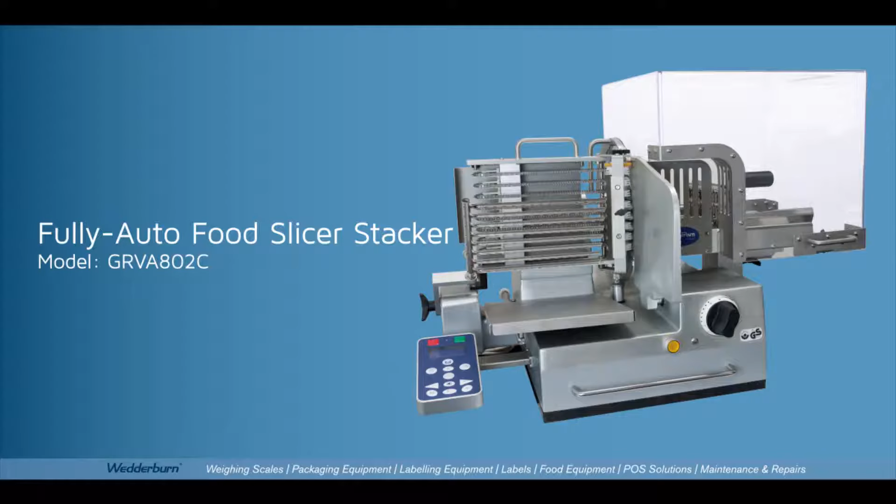Wedderburn proudly supply a range of robust and safe equipment for food processing. Today we are running through some of the features of the GRVA802C fully auto food stacker slicer. This is a high quality German engineered machine.

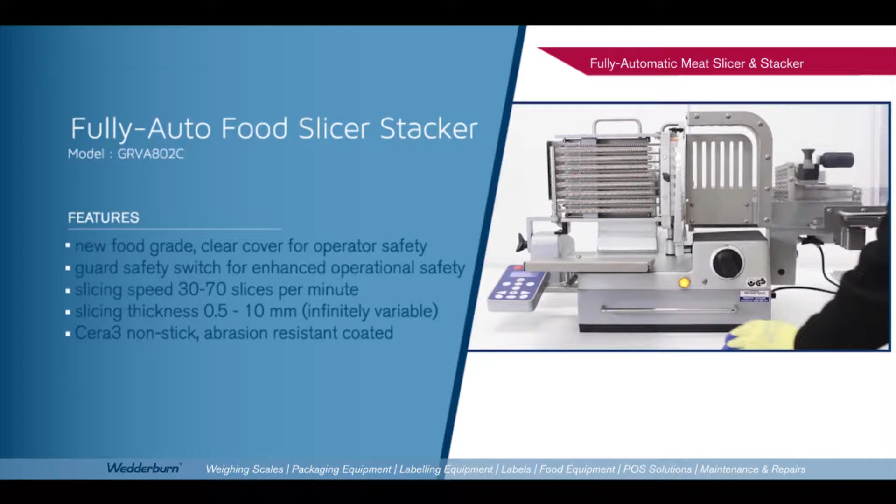On the screen you will see some of the features. It has a food grade safety cover, a guard safety switch, slicer speed 30 to 70 slices per minute, slicing thickness 0.5 to 10 mm. This machine also has a special non-stick coating. We'll be going through some of the safety features later on in the video.

Here are some of the slicing modes: stacking, shingling, slice direct and shaving. Stacking up to 90 mm high, shingling also up to 90 mm high. You can also adjust the thickness as you go.

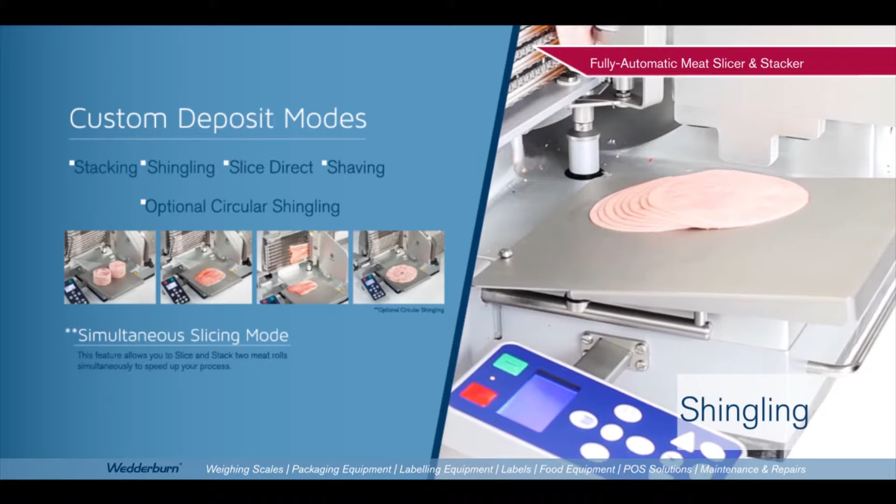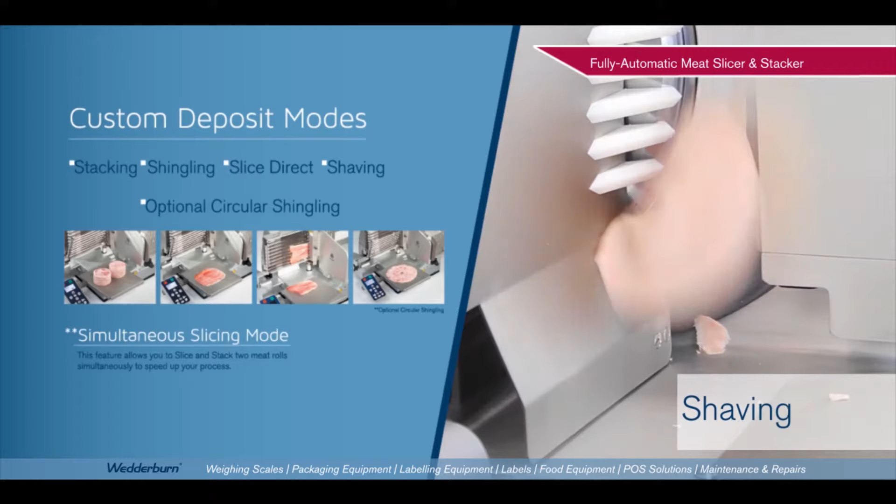Slice direct: you can slice direct into a box, on a plate or into your hand. Shaving: you can also adjust the thickness as you go. This allows you to slice and stack 2 meat rolls simultaneously to speed up the process.

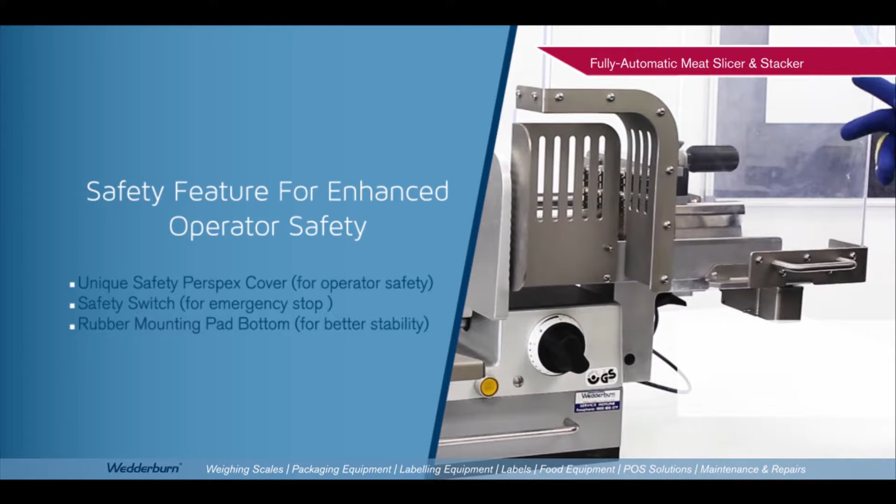Now we will go through the enhanced safety features of this fantastic machine. It has a new safety perspex cover for operation safety. It also has a safety switch, which will stop the machine automatically halfway through a process. It has a rubber mounted pad to make the machine more stable and to stop residue from getting under the machine.

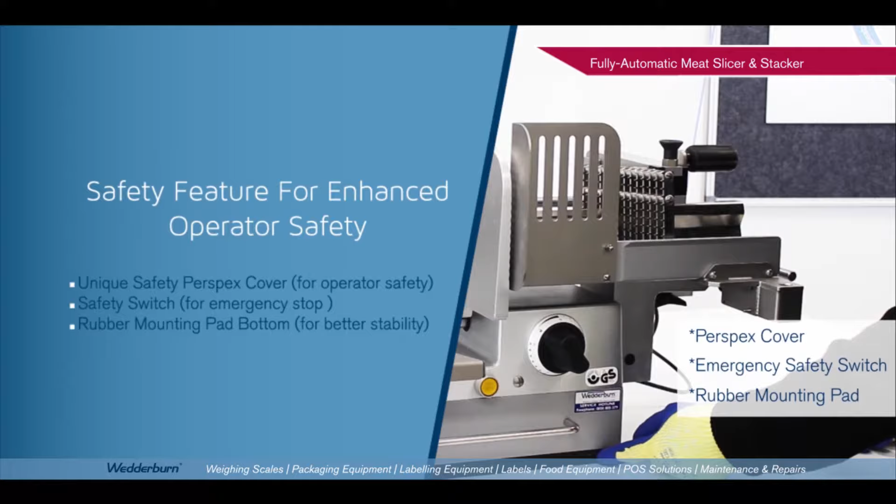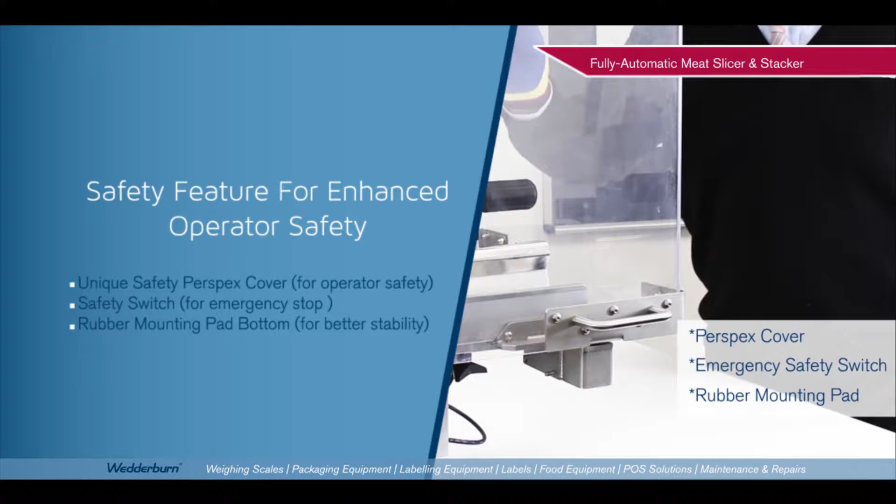This machine is easy to maintain and clean. It needs no tools to dismantle. All parts are easily removable for cleaning.

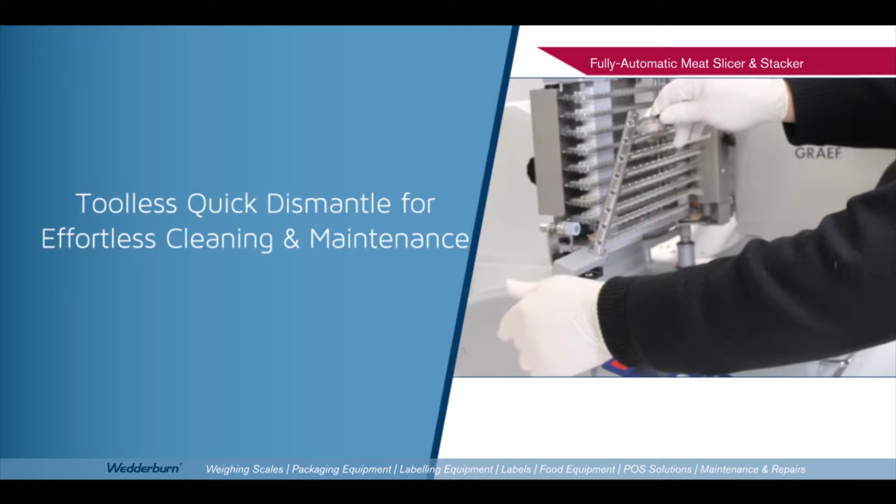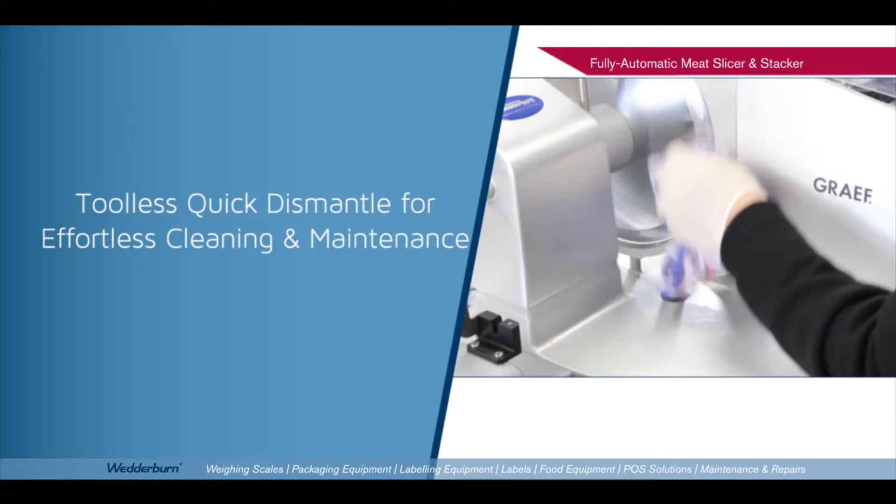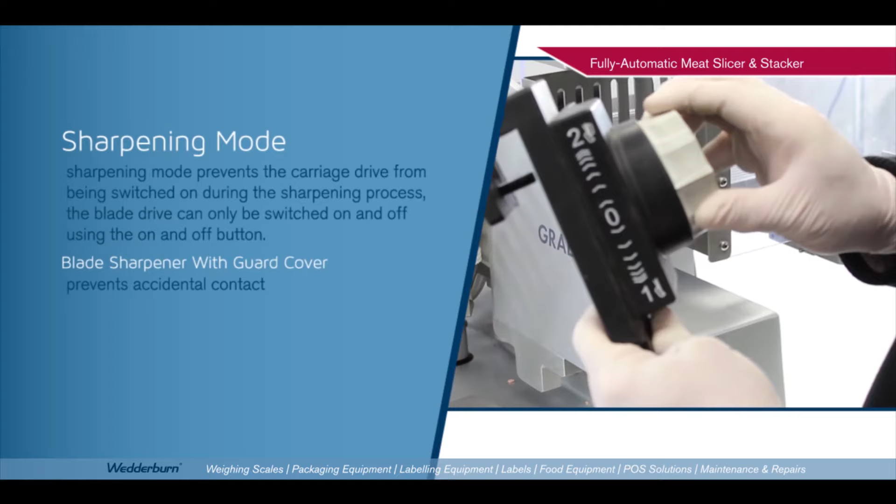All machines come with an easy to use sharpening device. Set the blade sharpener to position 0 using the adjusting knob. Number 1 is to sharpen and 2 is to deburr.